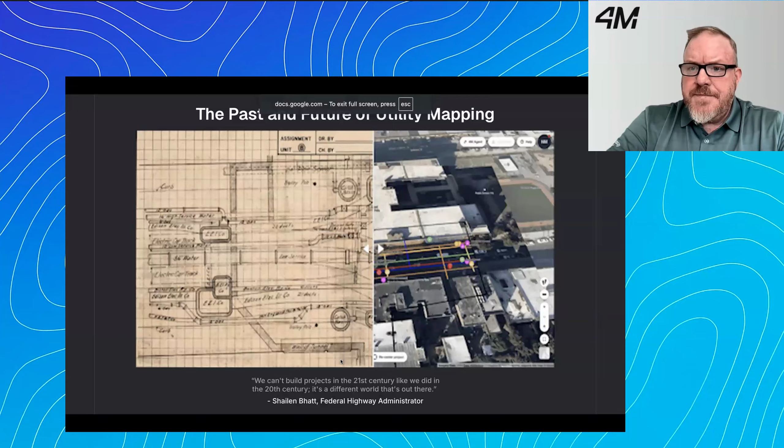Yeah, great. I think what I'll do, if it's okay, is I've got a few slides prepared that I'm going to walk through, and then maybe I'll turn it back over to you, Ed, to do the same. So let me show my screen here, and you guys tell me if you can see where I'm at here. Alrighty. Again, thanks everybody for joining.

What I want to try to do today with everybody is go on a bit of a journey, a look ahead to what is happening in the industry and maybe what we'll begin to see over the next 5 years. As everybody is probably aware, artificial intelligence is transforming lots of industries, but also the utility space as well, specifically about how we gain access to high quality, comprehensive utility maps in a fast, efficient, and cost effective way. But it's also fundamentally changing the approach to what is the origin of some of the challenges that we as an industry face today in the damage prevention side of the house. So it's really my mission to ensure that everybody here can be best positioned to benefit from the changes that are happening as a result of the implementation of AI.

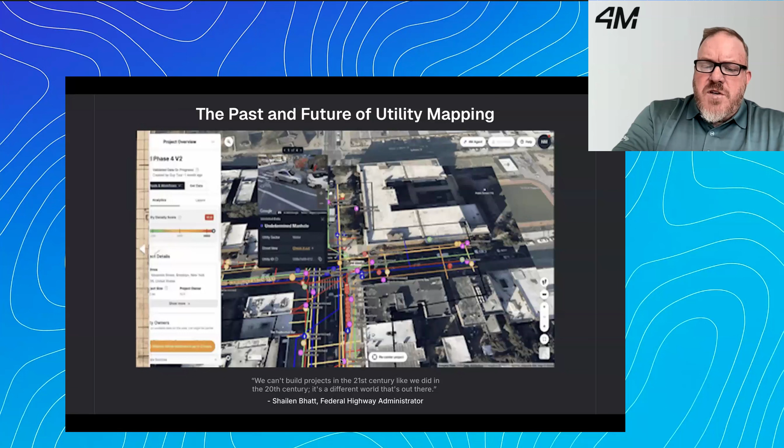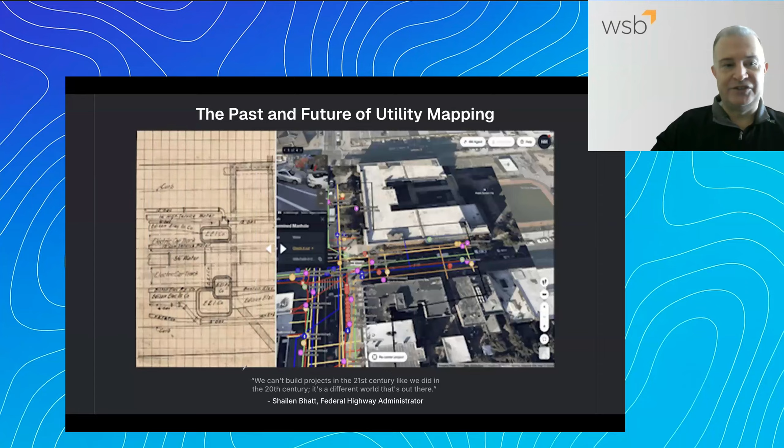So let me take us back for a second and let me know if the screen is changing here. Let's see. Is the screen changing there for you guys? No, still on the same map and plan sheet. All right, let's see. Slider bar. There we go. There you go.

So let me take us back to what is essentially the basic problem and challenge that everybody faces in the industry. Every 62 seconds, someone hits a buried utility line. We always have to ask, why does that happen? And there's a number of reasons for that. According to the Common Ground Alliance in 2024, there were about 230,000 or so utility strikes that occurred. And about 50% of the excavators who were out on site trying to get into the ground where they needed to, those locations, unfortunately, were not located in the time frame that they needed to be.

So there's a fundamental challenge around establishing what 4M is attempting to do, and some other folks as well, and that is create this baseline mapping capability that gives people a head start, and starts to bring together that early phasing of a project and the damage prevention efforts that are happening out there in the industry. So the current system, as we know it today, just simply is not sufficient, and in our view, it needs to evolve. It's no longer viable to begin damage prevention just at the breaking of the ground. It needs to be earlier. It needs to be a part of the initial planning, the initial discovery, the initial estimating on the projects. And by doing so, we're going to begin to see a reduction in the damages that happen out there on site when our excavators start to get into the ground.

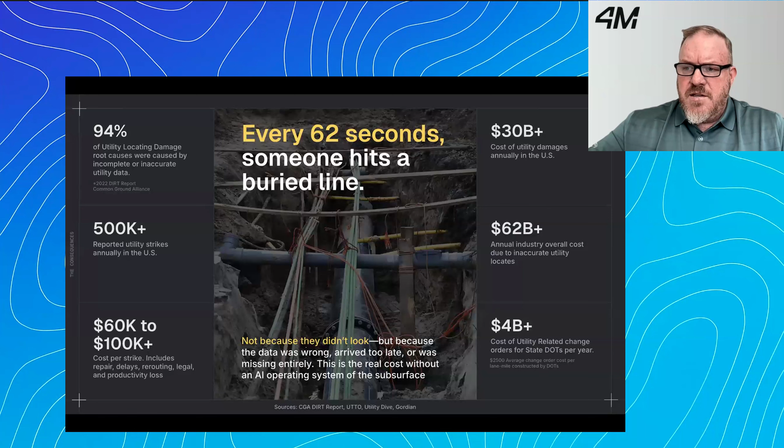So utility mapping today, as we all know, consists of trucks, boots, and locating devices, which is sufficient in a lot of cases for the work that needs to be done. But there's holes, there's gaps, there's challenges out there with this, not to mention the fact that in today's world, at the scale and pace of infrastructure development, it's having trouble keeping up. Manpower is an issue. Getting quality folks to participate in the activities that happen out in the field is a challenge, at least to all the organizations that I talk to.

So the problem is simple, but the consequences are really devastating. And with the advancement of new AI technologies, some of the things that we believe the technology can deliver are a reduction in accidental damages that happen out there because the data is made available. Planning errors as a part of the early planning and design process can be reduced. Construction delays, challenges with asset management, and a whole host of other areas where we think the application of AI can begin to make an impact on the industry.

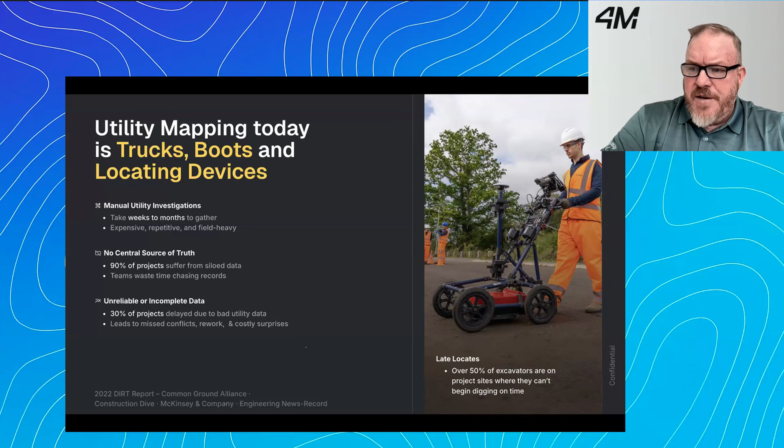So this is sort of an interesting picture of what happens out there on the project site. So everybody's involved, right? We've got multiple stakeholders, multiple players that are involved as a part of the infrastructure development process, including the project owners, the folks who are providing the funding. Oftentimes that's a DOT at the state level, the oversight agencies.

You might have 6 to 10 individual utilities, public and private, that are out there on a particular site. Maybe 10 to 15 different engineering consultants might be pursuing this work, might be participating and developing plans for this work. Then, of course, you get out into the field and all the construction partners associated with it. There are insurance agencies that surely have an interest in risk mitigation and the utility mapping component of that as well.

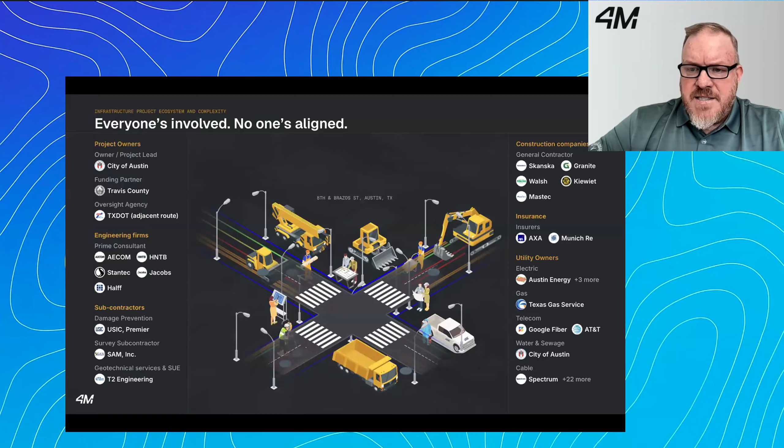So at 4M, we're trying to find the right technology or develop the right technology, apply it to the projects that are out there, the infrastructure planning, and then again, give that access to all of the stakeholders that are involved along the way.

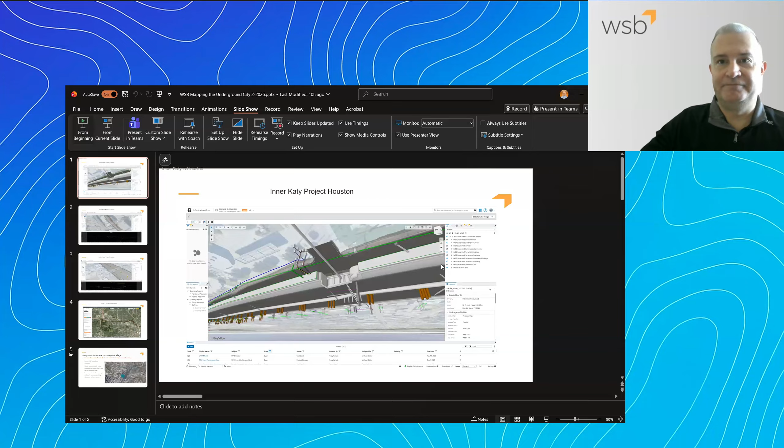So Ed, let me turn it over to you. You can take it away from there. Great examples, Joe. Thank you for the intro. Let me go ahead and share my screen real quick. I've got a few visual examples to share with everybody. Let me get those going. Make sure you can see these. Let me know when that looks good. We can see it. See it? Great.

So just a couple examples. The way that WSB and our teams have been helping both infrastructure owners as well as project teams and civil contractors is we start with the 4M utility map information. As Joe said, it's great when we can get an early start, pre-construction, early design, before we get to say 30%. If you're a DOT or Public Works, the earlier the better, because one of the advantages that we've seen in using 4M data is that it helps us rapidly get ready for both a design review and a constructability review.

And a lot of our focus today is making sure that existing assets like the utility networks don't have major conflicts, clashes with the design. It also means we have to look at design alternatives. And the more time we're given to look at design alternatives, the better outcome you're going to have with a project. You're going to avoid costly delays when you get into construction.

So a couple of good examples visually here. This is what we call our Inner Katy project. It's a project in Houston. You can see what WSB does today is we take the 2D utility maps from 4M, and we'll typically apply a public owner's standards for utility networks, or the utility owners' themselves. So diameters, different types of materials and standards can be applied to them.

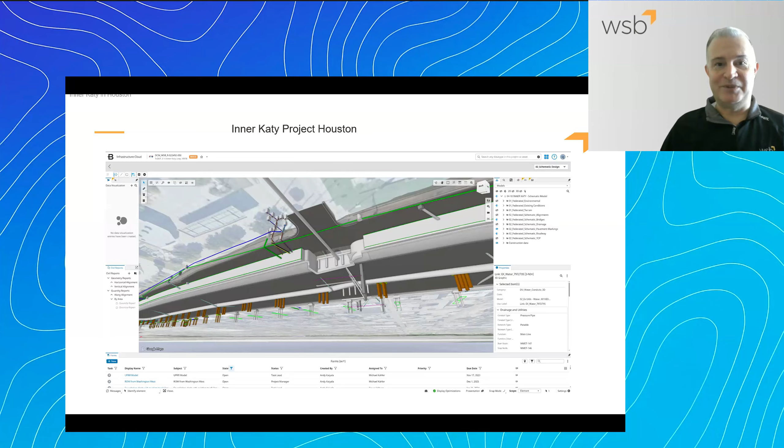But right away, even in this image, you can see we have a potential conflict with some underground assets and part of the proposed design, which you can see there in the middle. If you look at that particular utility, we do a lot of cross-sectioning for the project teams. So this is just a view of how we can cut cross sections that include both the utility map information, design information, locates, or field survey and inspection data.

This really helps also with dealing with RFIs and submittals in the field when your project team all have access and visibility into all of the data like this. It really makes resolving field questions, issues, or conflicts much faster. And on this particular project, we had several hundred RFIs and submittals to deal with. And it went pretty fast, actually faster than this owner had done in the past, mostly because everybody is working from a single data set that was very good to use visually.

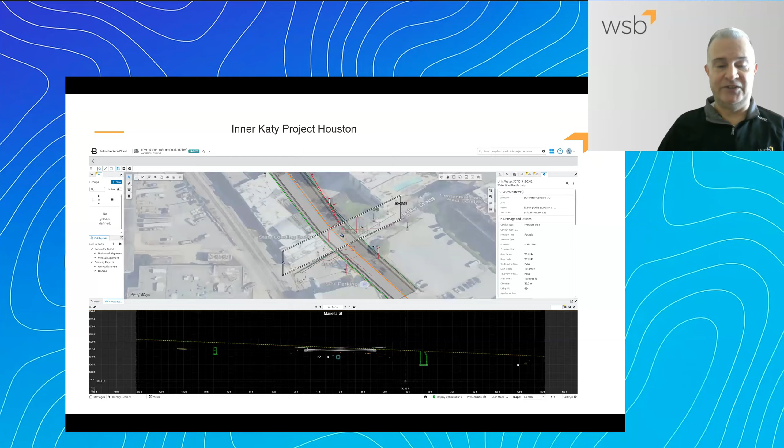You don't need to be an expert to be able to view and look at conflicts as an example, or look at potential issues with the utility move or plan with the design. So here's another cross section. It's just a different example of how we're able to cut those cross sections, look at that design information against the existing utilities or even proposed utilities.

One of the other big advantages we see with using 4M data is for our civil contractors, we actually integrate their schedule and their phasing of work. So we can actually provide a much better view of, hey, here's how the actual work, whether you're talking about utility moves or work on the roadway. Contractors like to look at that based on a phase or schedule. It does impact how they're going to attack quantities, for example, and pay items with the owner. So it just gives them much better information pre-construction, so that they have lower risks and can address project budgets and schedules accurately.

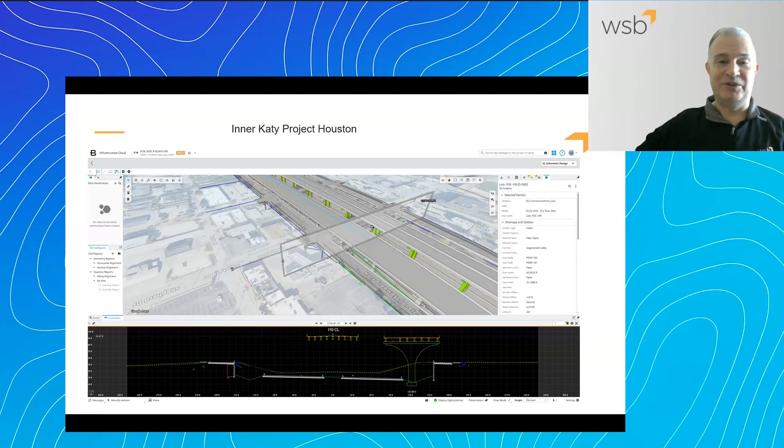This has been a big help. And most of the civil contractors we work with would tell you this is great information. They'd love to see it on every project that they do with owners. And I've got one kind of example. This was a very large project that we did in Houston. So this is actually a screenshot of the mapping, the original mapping data we pulled from 4M. So you can see it was a very large road section that we were looking at.

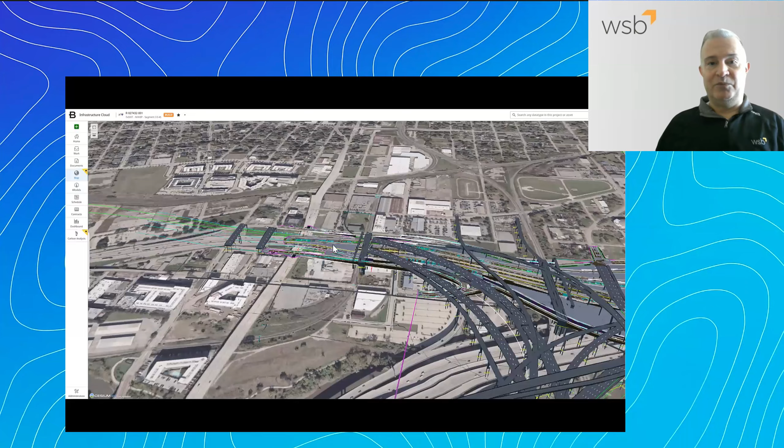And then I've got kind of a last slide with an interesting video that I wanted to show everybody. This is another project. This is actually in Dallas. So I think one of the advantages of using 4M that we've seen is that by getting that first project under our belt in Houston, which took us a couple months to put the data together, using APIs and some of the newer technology that 4M provides, we were actually able to model all of the utilities on this project, which is larger than the Houston project, and that was done in a matter of weeks instead of months.

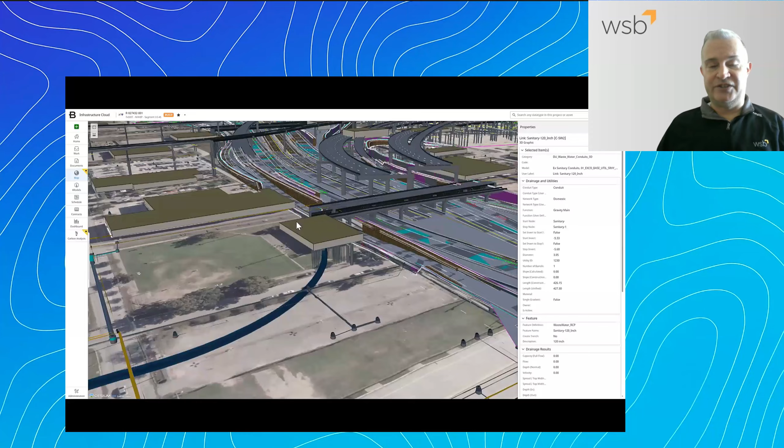So we actually cut way down on the time it took to prep the information, model it in 3D, model it to this particular owner's standard sizes, diameters, et cetera. And so we had better data sooner in the early design phase. It just gave us a lot more time to look at potential conflicts and how we're going to deal with the corridor and right of way. We had some tricky spots.

This one that we're looking at right here is a fun one where you've got a railroad coming through. You've also got that red brick building, which happens to be a historic building that we weren't aware of until we actually modeled everything out. So those constrain your options when you're looking at what you're going to do with your design and your utilities. This was great to have early on. It saved us a ton of time, and cost avoidance, risk avoidance later in the project.

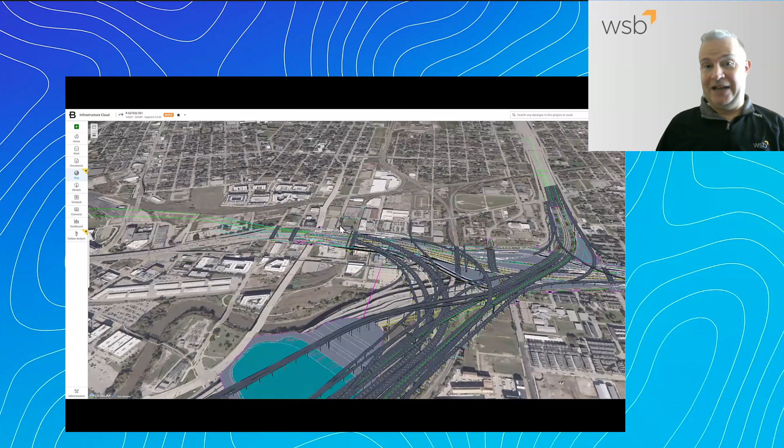They also had a massive sanitary sewer, about 120-inch diameter sanitary on this project. We really had to look at that. You can kind of see that they're showing it right now. It actually had some conflicts with some of the pilings that we were looking at from a design perspective.

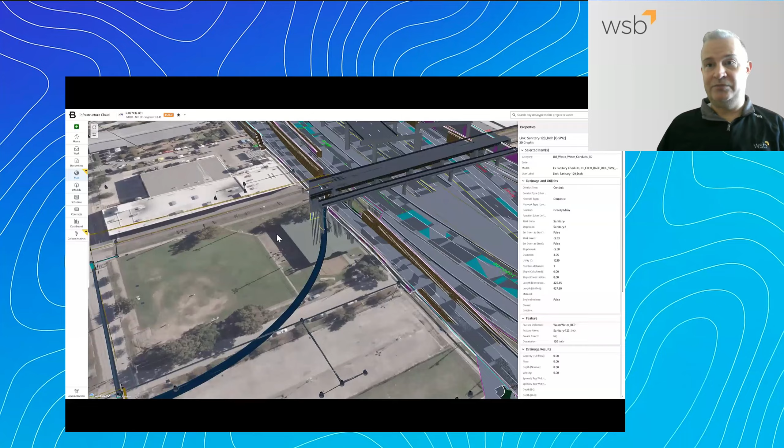Catching that early allowed us to help both the design team and the owner look at a design alternative to address that potential conflict. So really valuable information.

We've seen a tremendous improvement in our field users. They love to be able to view the data this way as well. It just helps them with more real world analysis of how they are actually going to deal with moving the utilities, constructing the design against those utilities. So there's a lot of value here both for the owner and the contractors.

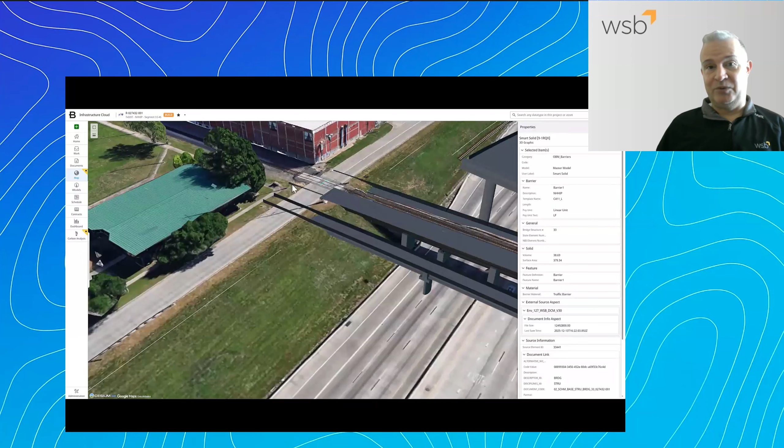And in fact, as we start to do more road projects, we propose 4M on most of our projects today in most of our states. Whether you're a DOT or a public works agency, it's really going to bring a lot of value. And this is just, for instance, design and construction. I would argue that really the value of 4M is thinking about how am I going to use it in planning, and then how is it going to help me in my maintenance and asset management operations as well?

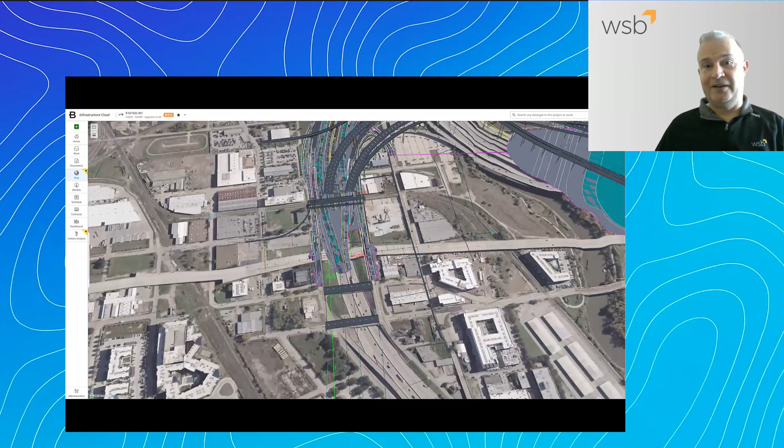And part of going through a project is we can actually provide updates to the 4M utility maps based on field locates, 811. So you get even better as-builts going into your maintenance and asset management phases. So lots of great opportunity here for you as an owner to look at this information. And I can tell you our contractor community is very happy to get this level of data because they haven't seen it before.

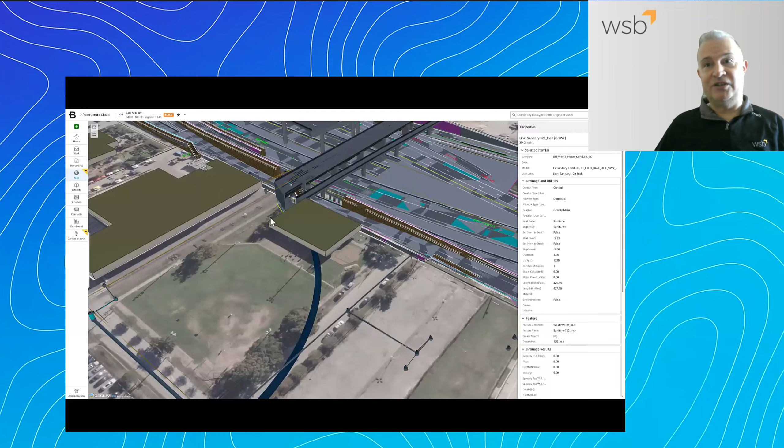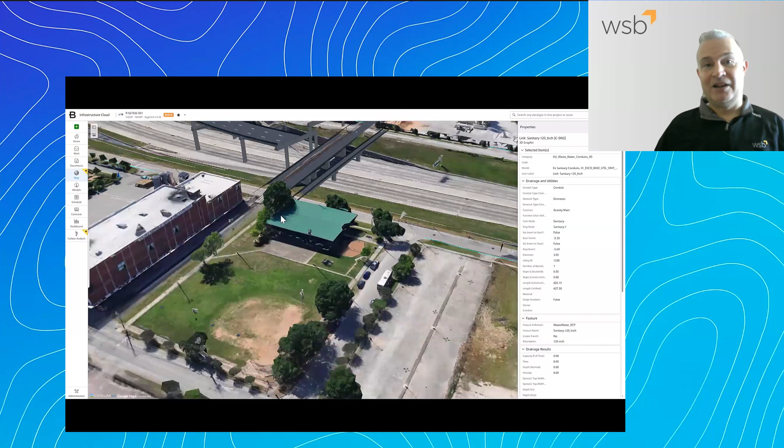So really good. Works well if you're a public agency and you've got good GIS data on your utilities. Think about it as layers of information. 4M is providing a great utility map layer, and then you can add layers of data, whether it's locates, 811, or other GIS layers of your utility information, and it comes together really nicely. In fact, we tend to bring those things together, for instance, in an Esri environment and just have multiple layers. So I can look at them all at once, or I can jump to each layer and look at those different details.

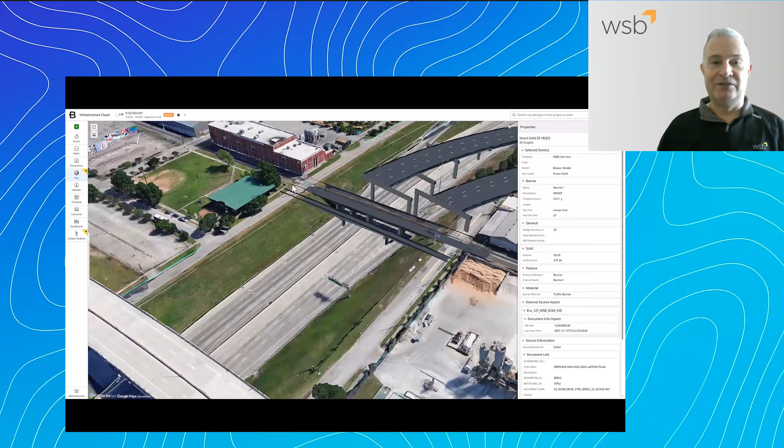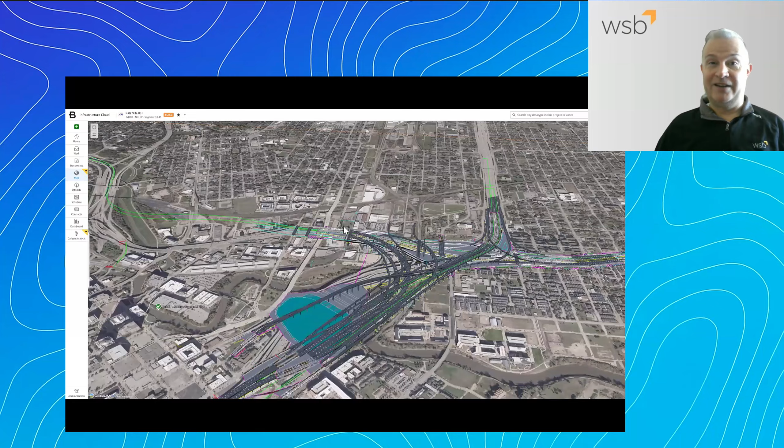So lots of value here. We're actually developing some great metrics from this project that we'll be presenting to several folks in Texas later this year. So we're looking forward to it. I've got other great examples. So if there's any interest in seeing other examples, we're always happy to show how we're using 4M in different types of projects with different owners.

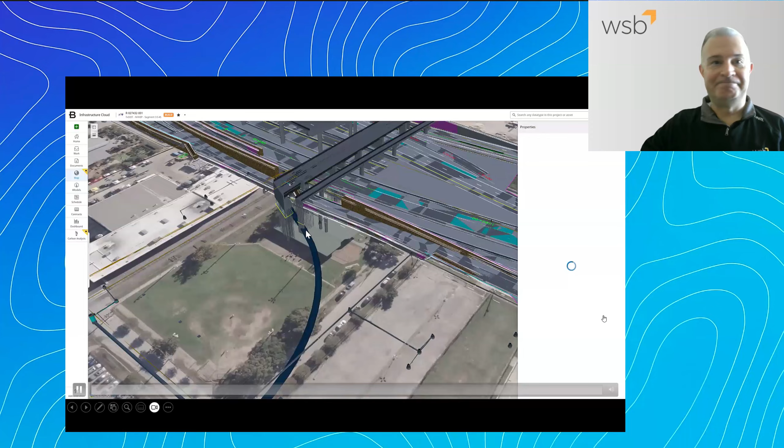Ed, thanks for sharing with us those examples. Those are really strong testimony, I think, to the power of what we're really talking about, which is establishing an early baseline data set that can be used as a part of those initial phases. And as you can see, in your examples they help us identify conflicts and design challenges where changes can be made early on and therefore not have the impact later on scheduling and delivery and cost and so forth.

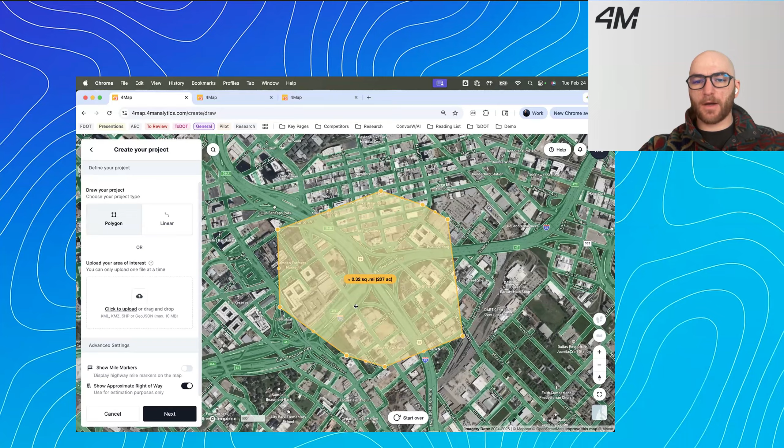Now, if you're working inside of a GIS system or in Autodesk, Bentley, or any other platform that you can export a KML, KMZ, Shape, or any other file format, we can bring those in and you can just go ahead and upload your project boundary inside of that. But what we'll do, select the area, and then just double click. From there, we can see that we're doing about 207 acres off the get-go.

Hit next. We'll do a quick name of this, put it in the folder so we can organize it, as well as we'll define what project phase we're doing. We're going to say this is a corridor, a conceptual study. We'll go ahead and say this is a road project and estimated budget 10 to 50 million in this case. And right off the bat, we'll hit view utility map.

As we're viewing the utility map, this is where we've gone ahead and actively pre-mapped the whole state of Texas and a number of other states. And we're pulling all of that data forward for your project boundary. What we're also saying is in the next 48 hours, we're going to go do our own QA/QC to ensure that any data that's in our pipeline that we're currently acquiring and can bring up for your project boundary, we're going to bring that forward.

So to the question in the chat, how current is the data that you're seeing and is being displayed? We are roughly 3 to 8 weeks from current data sources. So it depends on how actively that public record is being updated. As the data is getting pushed to the public record, we're able to absorb that, and then we're pulling that through our conflation process and then pushing that into that client-facing environment so you can pull that data up and forward. So it does take a little bit of time, but I would say that is very real time or near real time in terms of the construction life cycle.

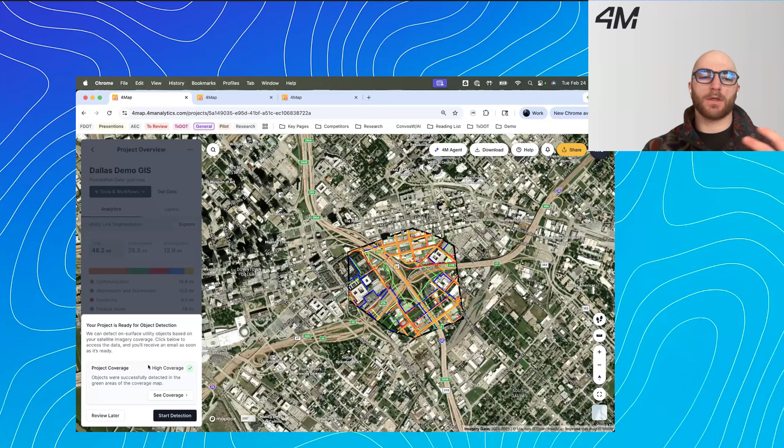So we'll hit start detection. That takes 2 hours to run. I actually have this project already processed inside of another tab, so I'll move over to that. But right off the bat for this project area, you can see we have about 48 miles of total utility lines and 22 distinct owners pulled up.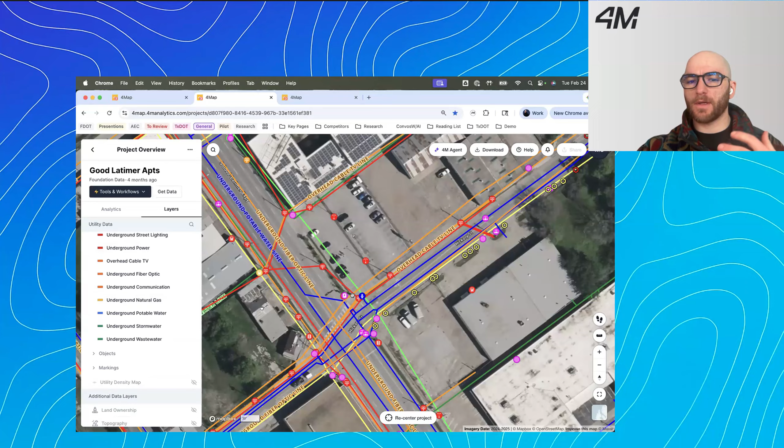So I'm going to zoom in to this specific area of the project. And here we can start seeing all of the different layers. We can see those here. We can filter if need be on overhead power, underground natural gas, and so forth. And we can start selecting that information and get an understanding of what's going on in this project area. We can select the line. We can see we have an underground natural gas line. This one's owned by Magellan Midstream Partners.

And then from the attribution, we can see we weren't able to pull forward all of the attribution because we weren't able to find that in the public record. What is underground is unknown, and we're trying to uncover what that is and what we can find from that search. And so that's what we're pulling forward.

The other piece is the data source. We provide 3 different data sources. Ones that are public: if we know the data source, we'll share that with you, who that record is coming from. Private: due to T's and C's, we are trying to communicate that we cannot share who that is, but we are verifying that it is coming from a private source. And the third one is 4M proprietary, or AI generated.

And what we're communicating with that is that we've identified an object, say a fire hydrant, and we've identified a main water line. We know through engineering logic and engineering judgment that fire hydrant and that main water line need to be connected. So we will draw in and connect that line. But because we're labeling it as 4M generated or AI generated, we want to communicate to you all: trust us, but go verify that this line is following that exact path that we're drawing.

It might have a jog, it might deviate a bit, but we want to communicate that there should be a line because said fire hydrant is connected to the main water line, or a gas valve that we've identified through object detection is connected to that gas line. So that's one example. Here we can select and we can see we have underground potable water. We weren't able to identify the utility owner in this case, but we were able to identify from our research that this is a 6-inch pipe, it's iron, and we have 2 utility sources inside of that.

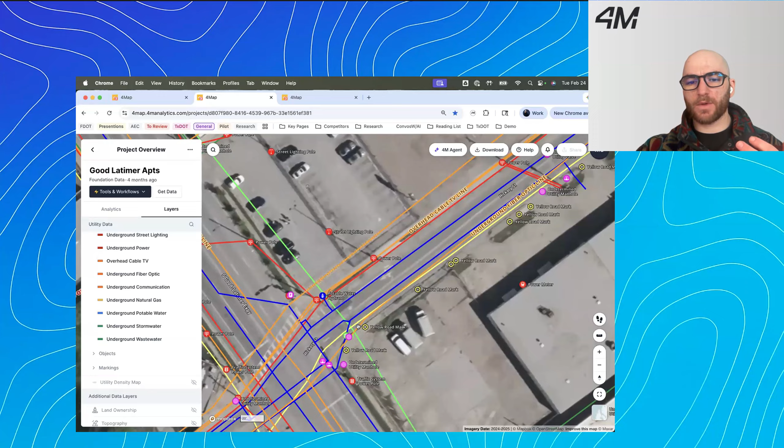As we move around, this is where we can start seeing those different objects. We can see the port, the fire hydrant. We can jump in, expand that. We can see where we are on site. We see we have 2 fire hydrants. We can see what other utilities. We have an ITS cabinet over there. We're connected to some power poles with telecommunication lines running on them and so forth. So we can get a good understanding of site conditions, what it is we're going to face and so forth.

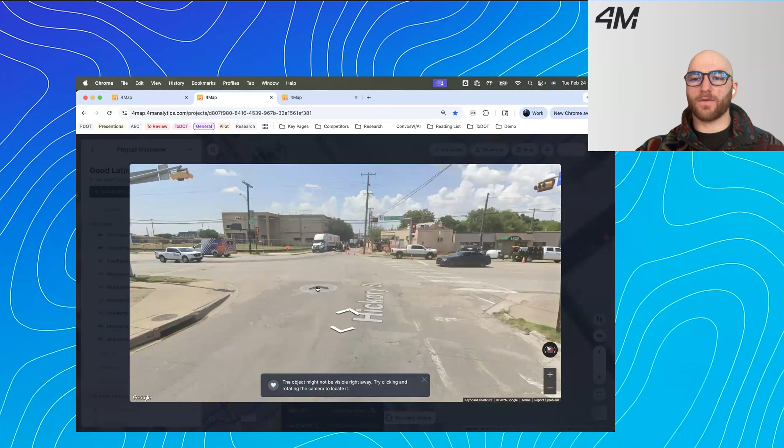Here we can see there's a yellow gas line, that road mark, but I'll move from that and actually zoom in on this road mark. And this piece is something that we just brought online, which is the ability to identify the 811 road marks. So someone has gone out into the field, actively used some type of geophysical measurement tool to identify, and then spray painted a road mark on. And we've trained the AI to actually identify that and notify it.

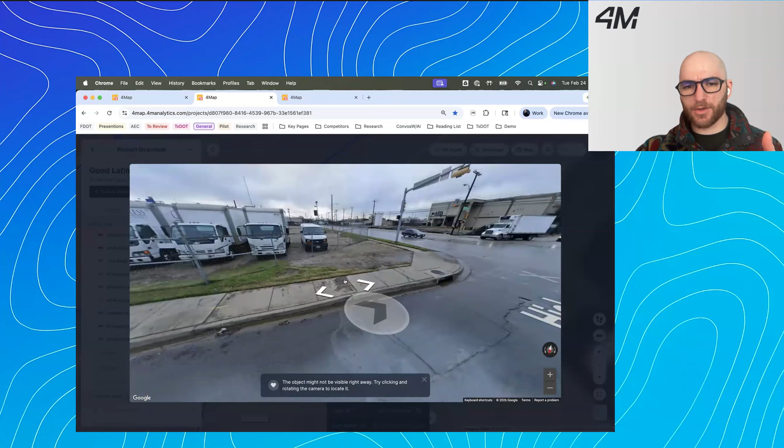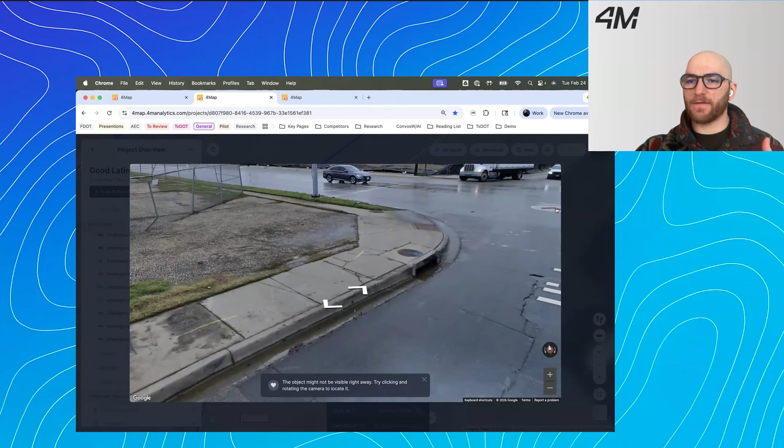So here we can see the gas line, and then we can see the road mark. We can select the road mark, we can expand into it to get the street view, and we can see, okay, that is where that gas line is showing and where it has been measured. We can see what else we are going to face inside of this intersection, and then we can get an understanding of what's the deviation, what's the range from what we're finding in the public record of where we believe that line to be and where it is being measured to. If you want, you can very easily measure that distance inside the platform. We can see it's roughly 6 feet or so.

And this gives a good understanding of, okay, we bring this in early in planning, we can start doing alignments, pre-scoping and scoping to get an understanding. As Ed said, the earlier you bring this in, the easier it is to adjust your design, alter before it gets into 30, 60, 90, and out to construction. So we can start reducing costs, mitigating conflicts early, and so on.

Lastly, if you need to get the data out of the system, you're working across platforms, you're working in Trimble, Esri, Bentley, and others, you can download the GIS file, you can download the CAD, we can push through a WFS connection over to any systems. So you can take all of the points, the lines, and the attribution and move that into the system that you need to do your design work in or do your daily work in.

I'll pause, stop, see if there's any questions. I covered a bunch.

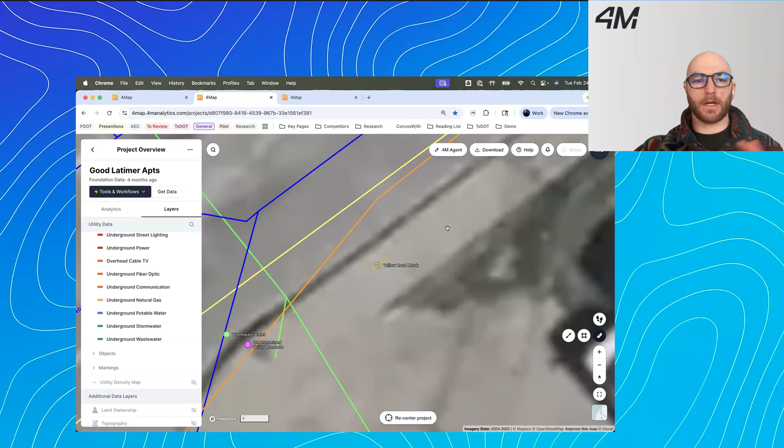I have a question. Trying to imagine myself here in Edmonds where I live, and I'm working for Public Works and I want to utilize the system for a major project that we've got going. What does 4M provide in terms of end user support, like training or qualifying people on how most effectively to use this system? And do you have a help desk for questions and things like that?

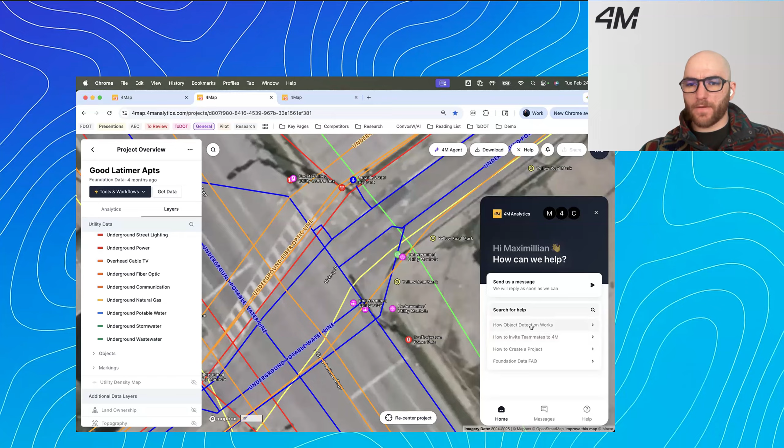Yeah, definitely. Up here, you can see we have the help functionality. This is where you can send us a message, and you'll have someone live on our side working with you. You can dive into what we call 4M University, and it'll walk you through how object detection works, how to invite members, how to share data, how to create a project, and really work through all of that.

As well, we have a very robust onboarding program with our client success team to really help ensure that you are being brought on, trained properly, and know how to use the platform. So multiple ways to communicate with us, both in platform and through the client success team as well.

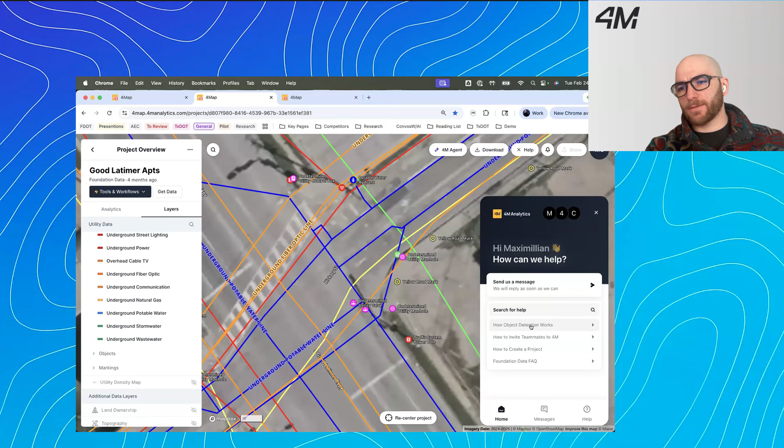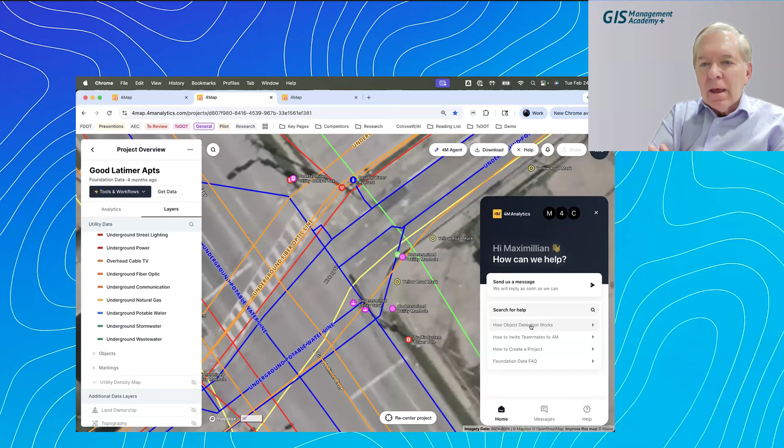Awesome. If this is the end of your demo, Maximillian, yeah, this might be a good time, with the three of you on the stage here, to take a look at the online questions. We'll go through them sequentially and wrap up our time that way. Oh, 16 questions. Wow.

So you can really do the same thing in any environment. It could be Bentley, it could be Autodesk. Trimble has environments to do this in. There are several options, which I think is the good news. What we do at WSB is we create a standard. So two things really make that conflict detection easier, faster, a little more automated.

One, we use the API feature from 4M. We can pull files manually too, but we've actually created an automated process to take 2D information and model it to 3D. That's part of why we can do it so quickly now, we're not manually modeling all that utility data out. It's automated. So I highly suggest you either partner with somebody that can help you do it, or it's not that hard to do as an owner. It's something you can quickly set up, and it's very beneficial because we do it on every project now.